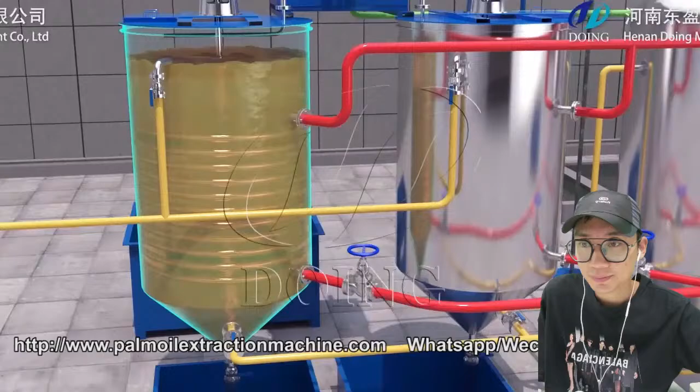Our company mainly serves you about cooking oil pressing equipment, refining equipment, and solvent extraction equipment. No matter what kind of equipment you need, you can directly put your questions or anything you like in the comments to let me know you're interested in our business.

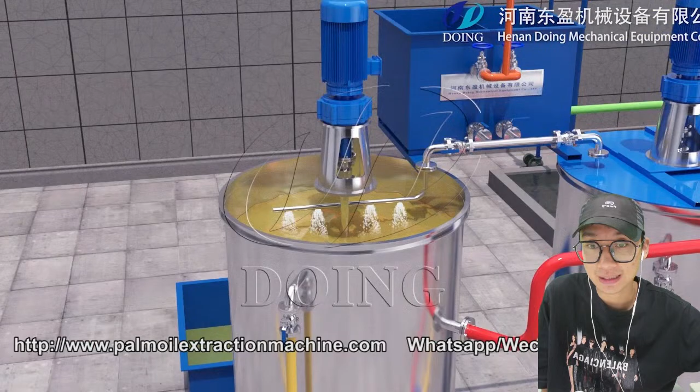Our company is located in Henan province, China, and we started the oil and fats business since 2011. So basically until now we've got more than 13 years of experience providing equipment for palm oil, palm kernel oils, rapeseed oils, sunflower oils, peanut oils. We can serve you for the solvent extractor, the palm oil presser, the refinery plant, or the cooker. We can provide all the equipment.

Before I introduce our company, I'd like to spend some time on the introduction about our company, Henan Doing Mechanical Equipment. It is located in Zhengzhou City, Henan Province, China, and we do have our overseas office, which is in Nigeria.

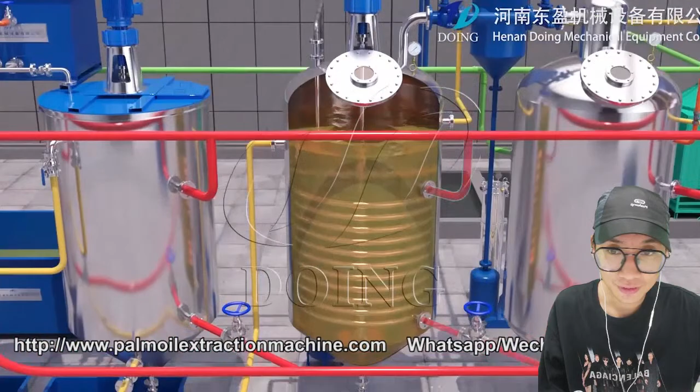Hold a second. Hey, what happened?

So yeah, we do have actually three factories, two of them in China, and one in Nigeria. Hey Joe, Mike, how are you? Good afternoon, welcome to the live stream. Nice to see you here.

This is Oliver from Henan Doing Holdings, and we can serve you with all kinds of refinery plant, cooking oils refinery plant, and also cooking oils presser, solvent extractor.

Hey Joe, where are you from? This is Oliver from Henan Doing Holdings. Hi, happy to see you, Joe.

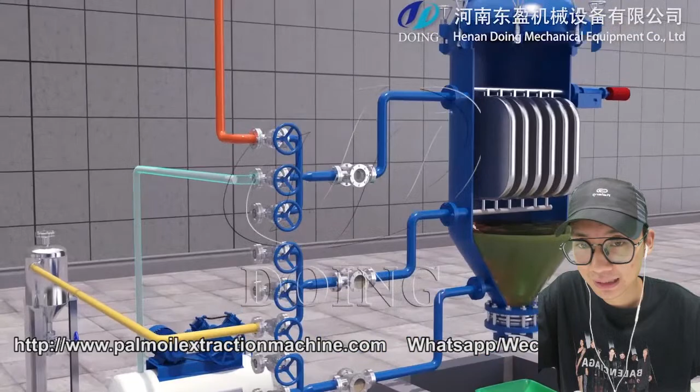I'm interested. What kind of equipment are you interested in, the refinery plant, our solvent extractor, or the presser? We can serve you with palm oil presser, palm oil pressing line, palm kernel oil pressing line, and ordinary oils like peanut oil, sunflower oils, rapeseed oil, sesame oil, soybean oils.

Oh, you are from Nigeria, right? That is so cool because we do have our overseas office and overseas stock in Nigeria. So if you want to visit for more detailed information, you are so welcome.

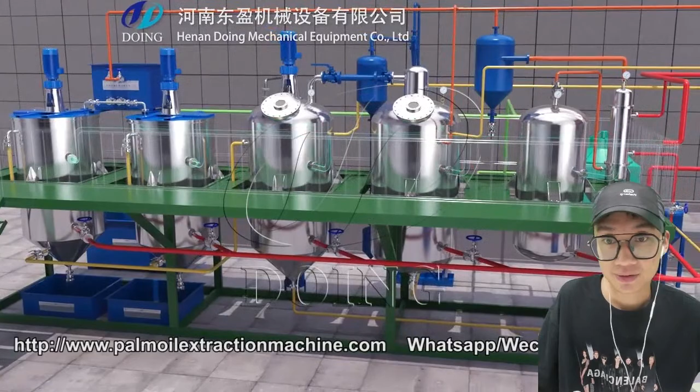For the batch type, we don't do the refinery in two pots. Instead, we do it in the same pot.

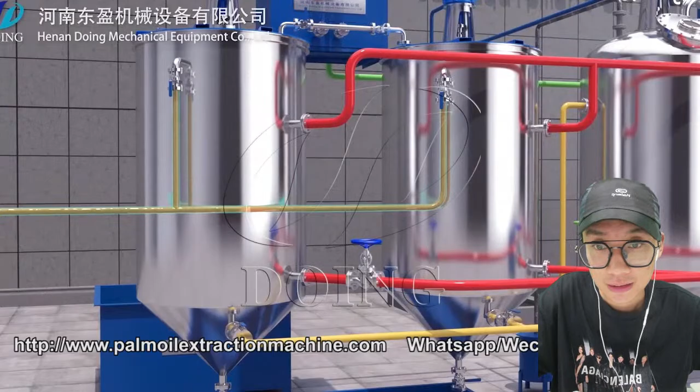For our equipments, you guys can check about the 3D videos first.

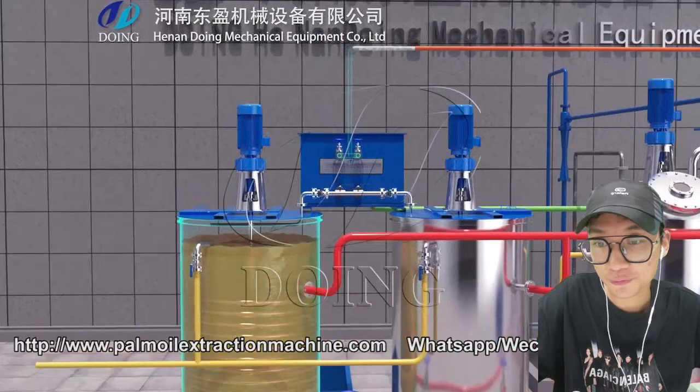The first step is degumming. We add food-grade phosphoric acid to the crude oil to transform the non-hydrated phospholipid into hydrated phospholipid, then add water to make the gum enter the aqueous phase so it can precipitate and be removed. The main equipment here is the refining tank with double speed mixing and a heating coil inside.

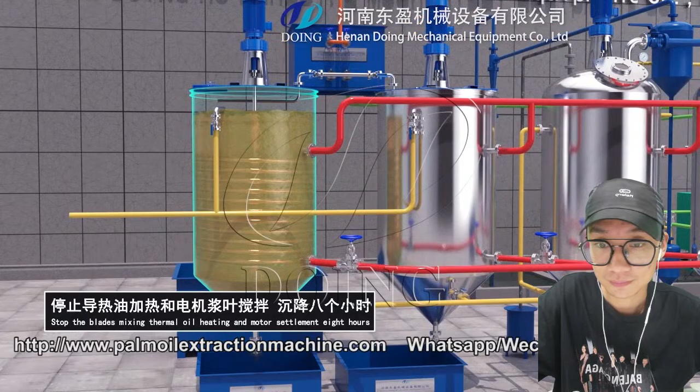What is the difference between palm oil refinery and palm kernel oil refinery? Joe, please add the WhatsApp number, because our sales manager can show you the difference.

Normally it is the same. You also do the palm kernel oils, right?

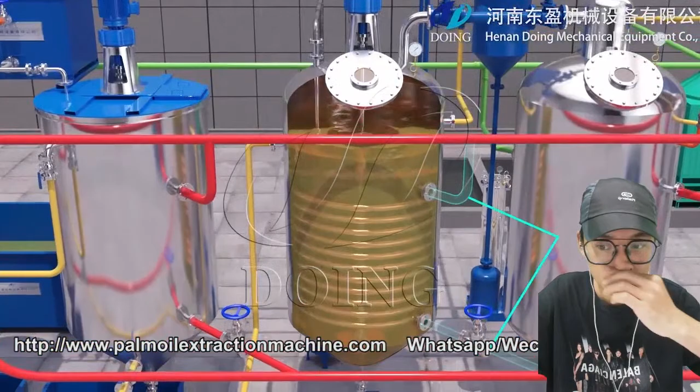Where is it? Okay, let's start from here again.

For the palm oils and palm kernel oils, you can basically use this whole processing line at the same time. It's actually the same equipment. This is the heat transfer oil flowing line. The first part is degumming, just like I said—we add phosphoric acid into the crude oils.

Next is our deacidification. The degummed oil is added with food grade alkaline for the acid-base neutralization reaction, then removed by heating and natural sedimentation. For detailed information, you have to check with our sales manager or our engineers team.

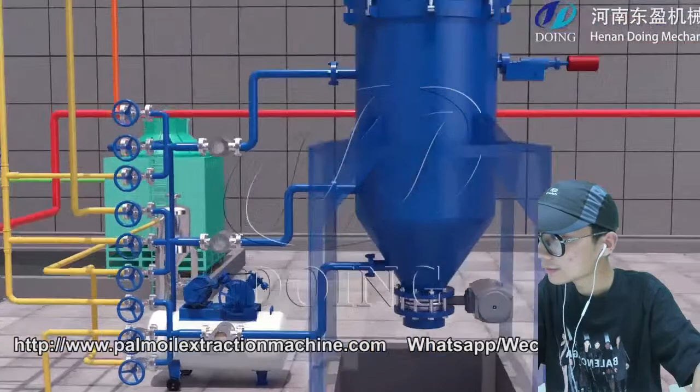And by the way, Thomas, where are you from? I'm from the US. For this year, we have our sales overseas office and overseas stock in Nigeria, so if you want to visit, you are so welcome, Thomas.

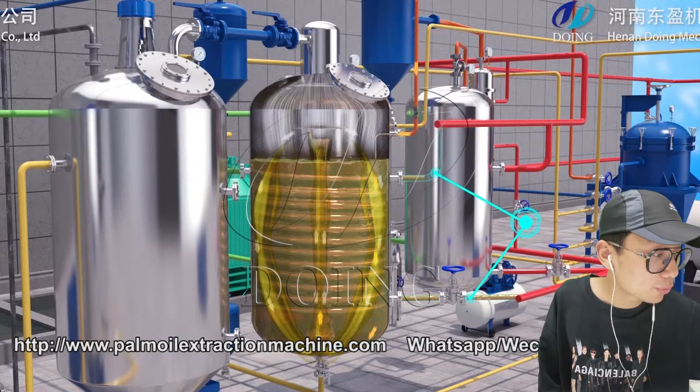After we finish the decolorization part, we also remove the clay through the filtration part. The solid-liquid mixture of decolorized oil and clay is introduced into the blade filter, and the white clay and oil are separated by filter plates so as to achieve the purpose of filtration.

Hold on a second, let me check about that.

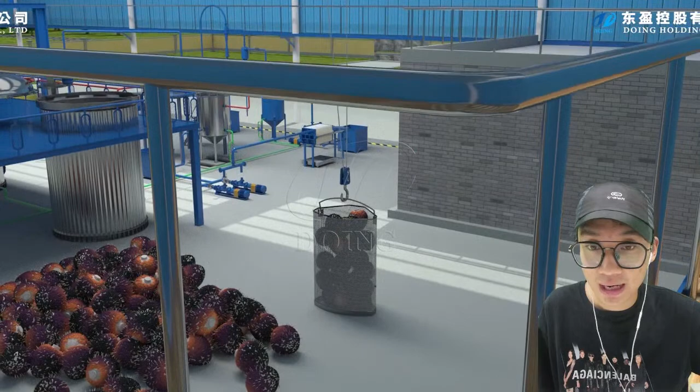It is the reception, and when you receive the palm oil, palm fruits, you better handle it within 24 to 48 hours, which is 2 days, to make sure of the final quality of the palm oils. And the first equipment that we use is the sterilization.

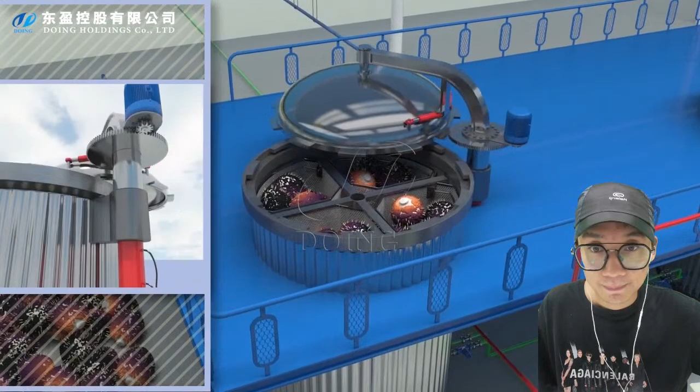You guys can see this is our sterilizer. You can input 4 fruit cages, or if you want, you can use single, double, triple, or use all of them. We also have a steam boiler, like a bundle. You can burn the woods, or you can just easily burn the empty bunches to bring the high temperature.

Especially for the sterilizer, the temperature is normally around 160 to 180 degrees, so that we can destroy the enzymes inside the palm fruits, and we can also avoid the increase of the FFA.

And what is most important, we can soften the fruit, so that at the next part, the thresher, we can make sure all of the fruits will easily come out of the bunches in a really easy way.

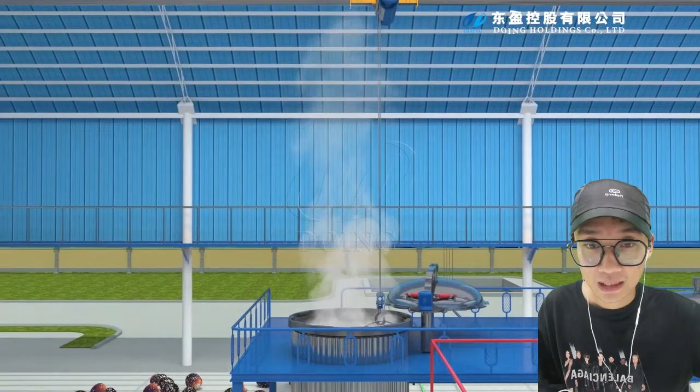Normally we will do the sterilization for 60 to 90 minutes and we're done with it. So we use the hanger to put all of the fruit out of the sterilizer and move to the next part, which is the thresher.

For this video, it is basically about the bigger capacity processing line, but we do also have simple versions. If you're interested, say something in the comments.

So currently, this one I'm pointing at right now is the thresher. Really simple structure. After doing the sterilization, all of the fruits will come out of the bunches in a really easy way. The length of the thresher is about 1 meter to 2.5 meters. It is long enough to thresh out the fruits.

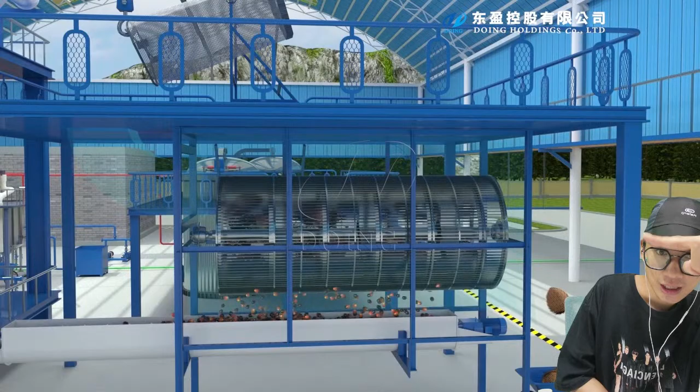And the equipment also rotates, so all of the empty bunches will come out of the thresher and be collected by the blue carts. Besides, inside of it, there is a helix design.

If you have any questions, just let me know by putting your question in the comments, ladies and gentlemen. And then it is our bucket elevator, which is connected with a screw conveyor.

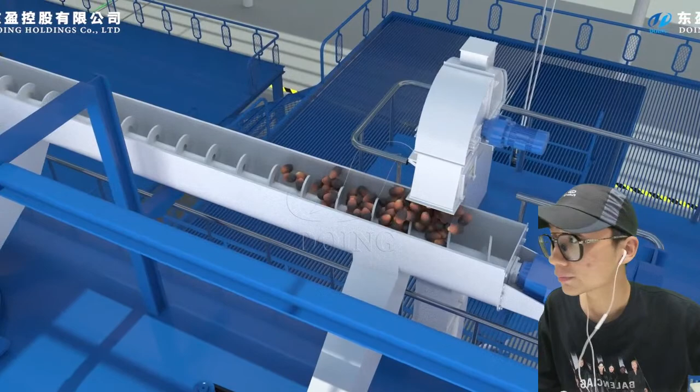And then it is our digester. There are so many stirrers and paddles adopted inside to digest all of the palm fruit before we do the pressing. During this part, you guys can check here the blue pipe around the digester.

It is actually a steam pipe. It can bring the high temperature again, to soften the fruit before we do the pressing, to make sure that all of the palm fruits are in the best situation before pressing.

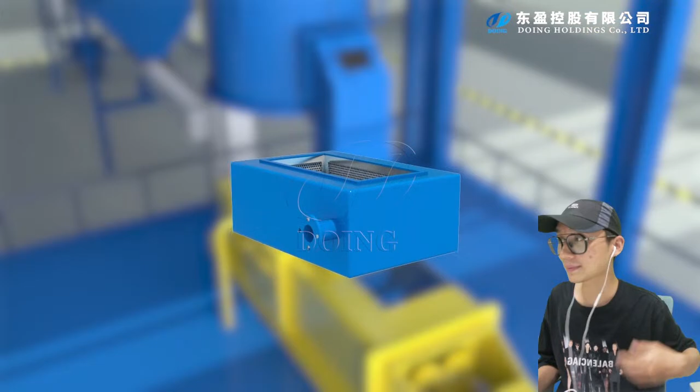And then this is our little collector, because during this part we get some of the crude oils. To avoid the loss and to improve the final crude oil quality and oil rate, we do set a collector.

You guys can check here, this is the main equipment in the whole processing line. This is our double screw palm oil presser, and we also have a single screw palm oil presser. The total difference is about the screw: one has 2 screws and the other only has 1. The single screw palm oil presser is more suitable for 500 kilograms per hour.

The capacity is normally about 500 to 800 kilograms per hour. But for our double screw palm oil presser, the capacity differs from 1 ton per hour to 100 tons per hour. So no matter how many scales you have, we can provide you a customized design according to your needs.

And just like I said, the palm fruit is a fruit that bears in subtropical and tropical areas, especially in Southeast Asia and Africa. They have done a perfectly good job with the equipment, but we have made a lot of improvements on that basis. For example, the palm oil presser.

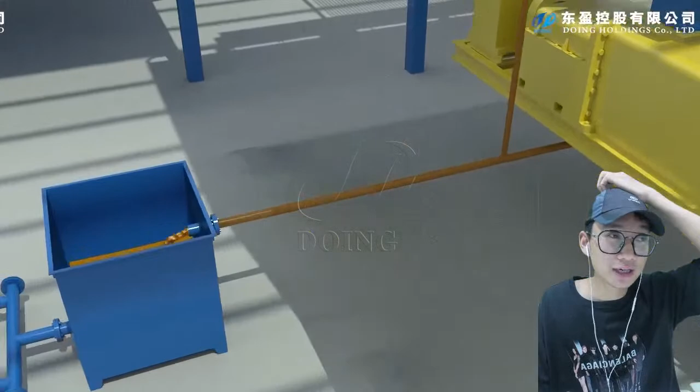But with our equipment, after we produce the screw, we do one more step, which is to polish it, to make it really smooth and tidy, so that all of the fruits get in touch with the screw. It will not easily cause clogging. And the oil rate is really high. The oil residue rate is normally around 3%, which is a really low rate.

And then this is our temporary storage box, and this one is our central vibrating sieve. You can see there are two mesh sizes adopted inside, one is 20 and the other is about 40. When it is working, it keeps vibrating, so all of the big impurities like the fibers or some nuts automatically drop at the impurities outlet, and the crude oil drops at the other outlet.

And then this is our clarification tank. The use for this one is to remove the big impurities like the nuts or metal things.

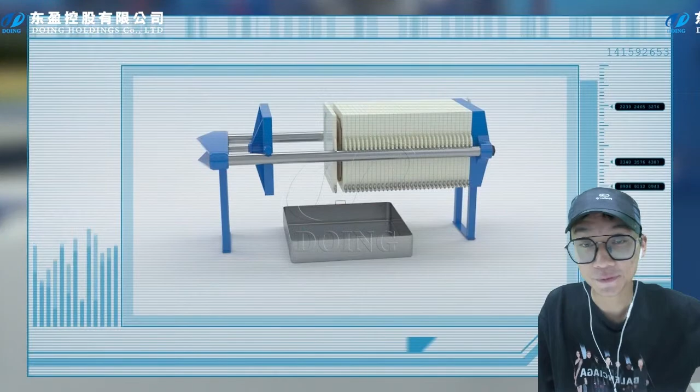plus a plate filter to do the filtering, of the big or tiny fibers, or the water content, the humidity. This plate filter removes the impurities, the fibers, tiny impurities, and also evaporates the water. And this one is our steam boiler to bring the high temperature for this whole production line.

So basically that is all about how we do the pressing for palm oil. And for today's live stream, the main thing is to show you the refinery plant. So let's go back to the refinery plant.

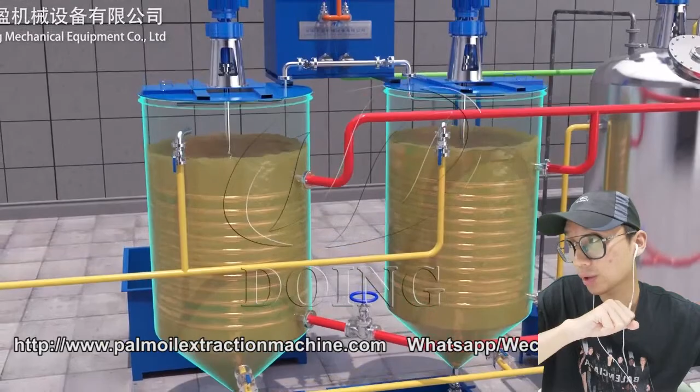So yeah, this is our refinery plant. So for the degumming part, we will normally add 85% to 95% food grade phosphoric acid, and the amount of phosphoric acid added accounts for 0.05% to 0.2% of the oil weight.

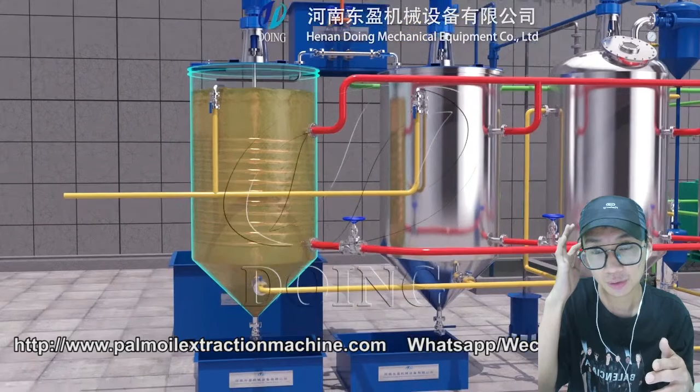Generally, the degumming section is not set separately for semi-continuous or batch type refining, but it is completed in the same equipment with the alkali refining section. I mean the degumming and deacidification of intermittent and semi-continuous refining are completed in the same tower. And for continuous refining, the degumming and deacidification are done in different equipment.

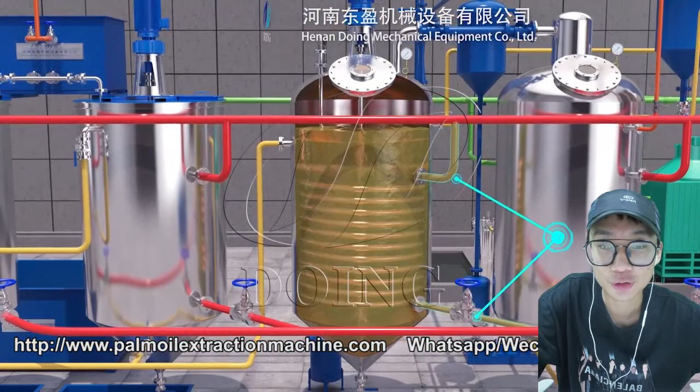And then it is our decolorization part. For the decolorization part, we will add 1 to 3% of the oil weight of decolorization agent for physical adsorption, and then filter equipment separates the oil and decolorization agent to achieve the purpose of decolorization. Yeah, this is the equipment that we use to remove the clays.

Let me just pause it here to show you more. Especially for the decolorizing, the specific process is in the decolorizing tower in a negative pressure state. We will add 1 to 3% of the oil weight of the decolorizing agent to do the physical adsorption, and then filter equipment separates the oil and the decolorizing agent to achieve the purpose of decolorization.

The pigment components in vegetable oil are very complex, mainly including carotene, flavonoid pigment, anthocyanin and some carbohydrate and protein decomposition products. Oil decolorization commonly uses adsorption decolorization. The principle of the adsorption decolorization method is to use an adsorbent with strong adsorption power to adsorb pigment and other impurities in hot oil, and to remove the adsorbed pigments and impurities while filtering the adsorbent to achieve the purpose of decolorization and purification.

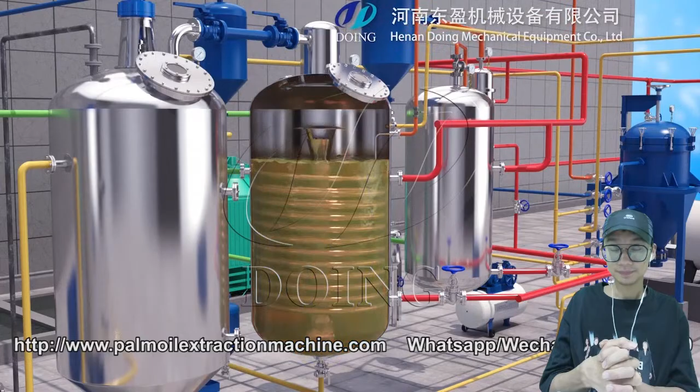That is basically all for the refinery plant. And hold a second, let me show you the fully continuous one. This one that I'm showing right now is a batch type one, but we do have a fully continuous one. Yeah, it is over here. You guys can see this one. It is about 100 tons per day. It's a fully continuous refinery plant, which is more complicated.

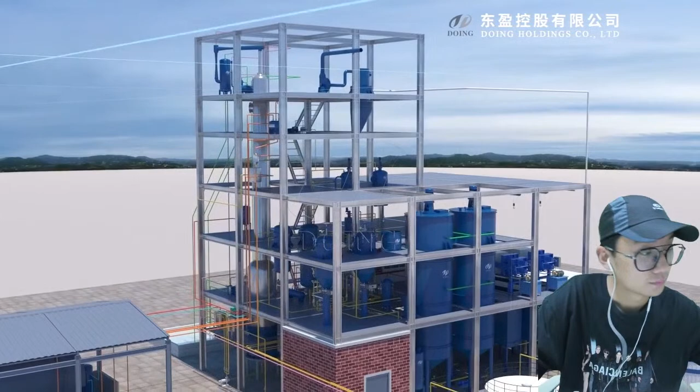Wait, what? Yeah, I'm still lagging. It is so obviously.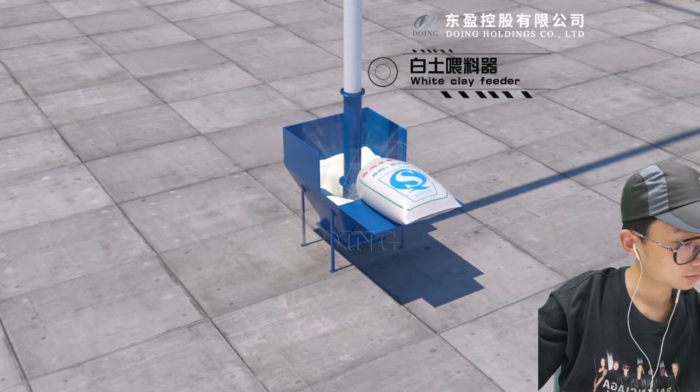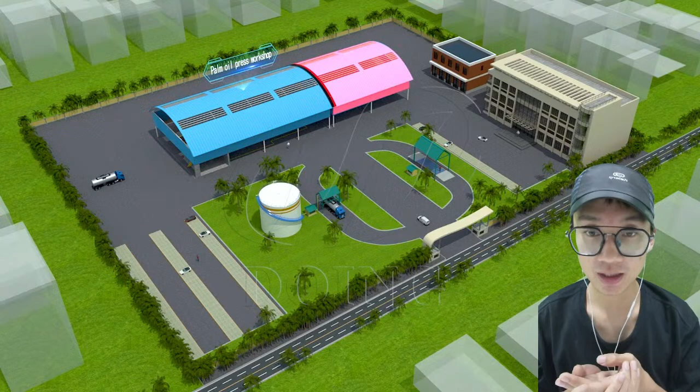All right. I mean, yeah, if you're curious about this fully continuous one, it is normally suitable for 100 tons per day. But if your workshop is smaller, you can choose the batch type one. I just let you guys watch the palm oil processing line, but also let me show you the palm kernel oil processing line, which we can also serve you with the equipment. No matter the presser, the solvent extractor, or the refinery plant, we can serve you guys.

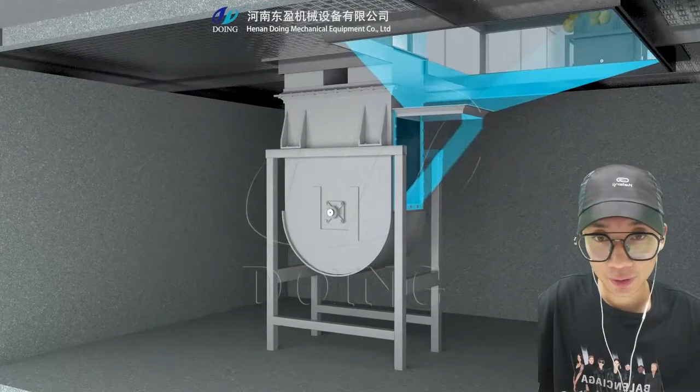This is our palm kernel oil processing line. Let me just start from the beginning. If you have already done the palm oil or palm kernel oil business, you will know when you get the palm kernel, there will be a lot of fibers on the surface. So this one is our separator for the kernels and fibers. Really simple structure.

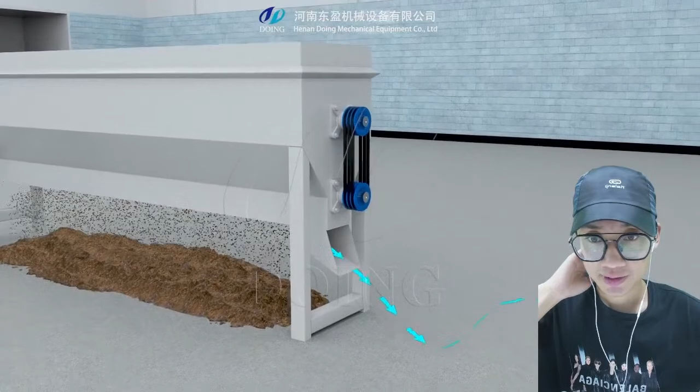And then it is our kernels and shell separator, because before we do the cracking, before we do the pressing, we have to separate the shells, because the shells don't have oil, and they will also take away some of the crude oil and lower the oil rate, and sometimes they will also damage the presser, so we'd better remove the shells first.

This is our bucket elevator. This inlet part normally touches the ground or is underground. And over here, where I'm pointing right now, there will be a magnetic separator to separate the metal things. If there are irons or some really hard things mixed inside, you can easily separate them. Otherwise, they may damage our equipment.

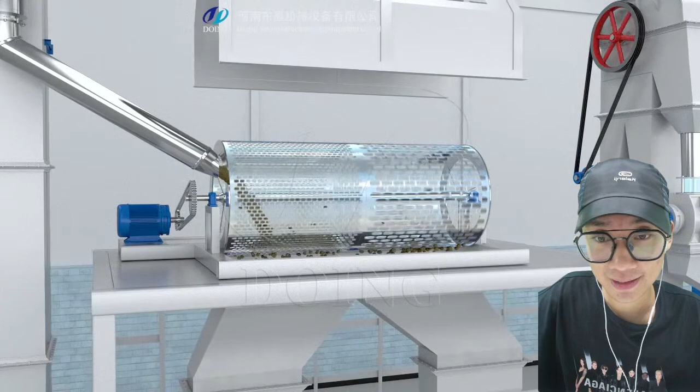And then it is our nut grading machine. You guys can see the left part's mesh size is smaller than the right part's. So it will separate the nuts into two parts, smaller size and bigger size, because the next equipment we use is a cracker to crack the nuts into shells and kernels.

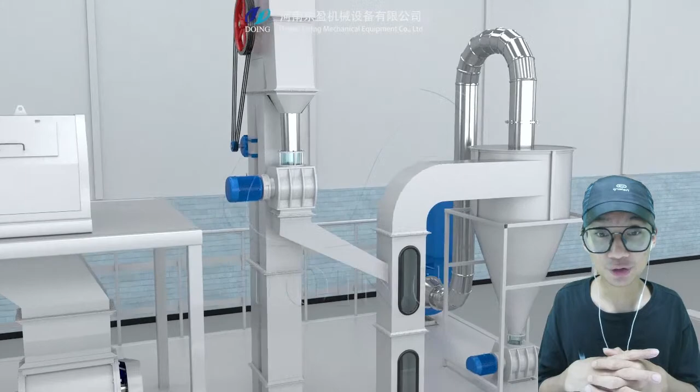This is our cracker, really simple structure, rotating at a really high speed. After the cracker, we normally get the shells and the kernels at the same time, mixed together, and then through our screw conveyor connected with our bucket elevator, they get into this separator. The weight of the kernels and the shells is totally different, so all of the kernels will automatically drop to the bottom, and our shells will easily be collected by the cyclone and the fan.

Yeah, this is the cyclone and our fan, to make sure the shells will not fly around in the workshop, to keep our workshop clean and tidy. This is our separating column.

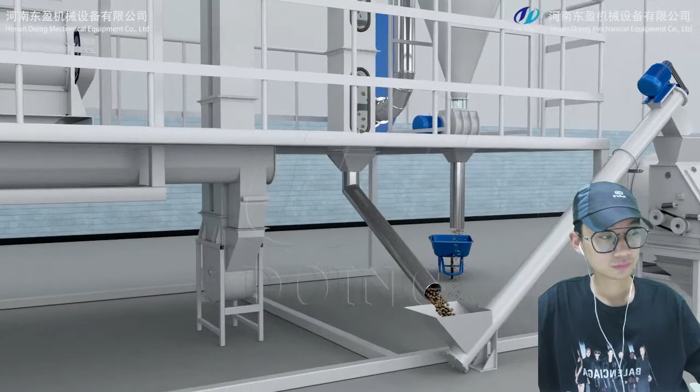And then it is our crusher. Normally we crush our kernels into small slices, normally 4 or 5 slices, so they will be in the best condition before we do the pressing. And then it is our cooker, or we can just call it a roaster.

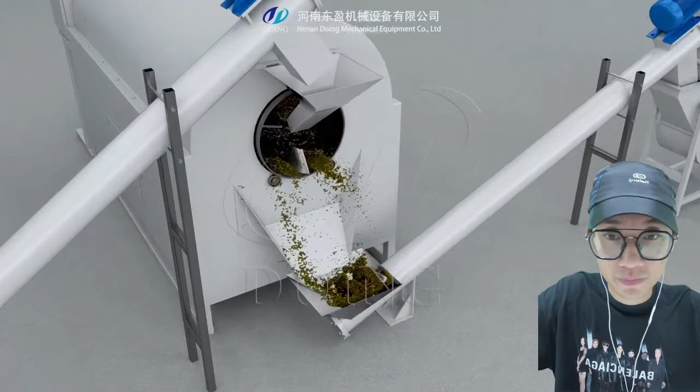Helix design, really special design. We can easily control the temperature and the humidity. And then it is our palm oil presser. Bucket elevator.

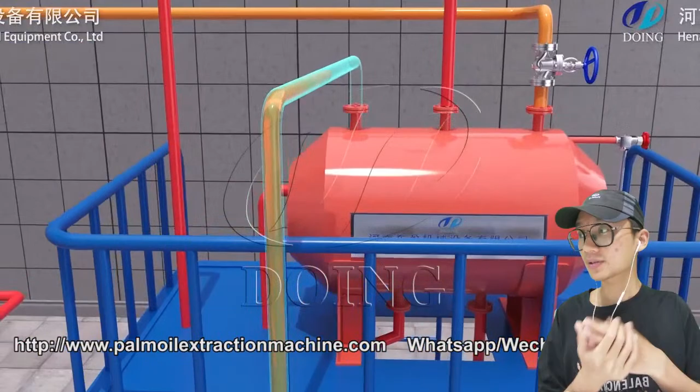Henan Doing Mechanical Equipment is located in Zhengzhou City, Henan Province, China. And Doing Group is an enterprise integrating engineering, R&D, equipment manufacturing and installation, project contracting, technical service, and international trading. We are mainly engaged in grain and cooking oil machinery, tire process and distillation machinery, cassava products deep processing machinery, starch machinery, and some business like this.

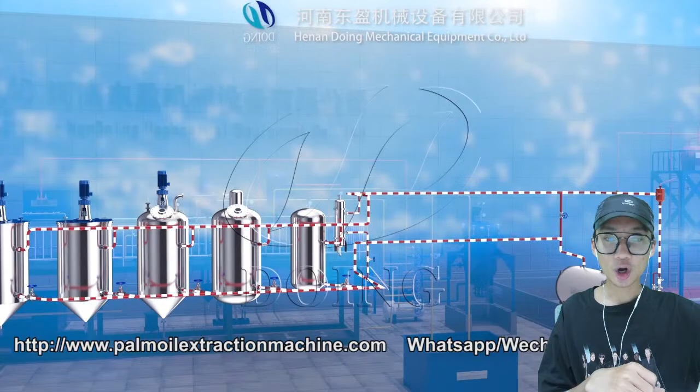And our company has a powerful capability of scientific research and designing, hardware facilities, and we use advanced techniques. We have more than 30 senior technical staff majored in oil technology, electrical appliances, automation and machinery. We established perfect cooperation with Henan University of Technology and have undertaken to complete a number of major engineering and technical services abroad. We own a professional installation team with rich experience, which guarantees the quality of the project.

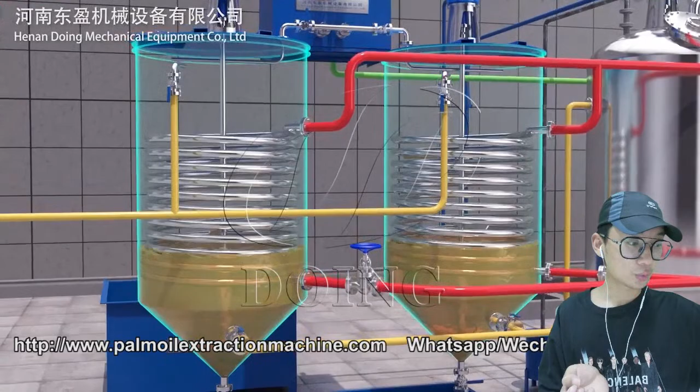And Doing Group focuses on developing new products and technology. We have developed 1 to 120 tons per hour palm oil processing equipment. Our designing technology and manufacturing ability have reached the top level in the world. Our machines have been exported to more than 40 countries like Indonesia, Malaysia, Thailand, Nigeria, Liberia, Congo, and some countries just like this. And we do have our overseas office, which is in Nigeria. So if you are living in the nearby countries, welcome to have a visit.

And we can serve you 5 to 2,000 tons per day edible oil pressing machines, 30 to 2,000 tons per day solvent extraction machines, 1 to 1,000 tons per day edible oil refinery machines, 1 to 120 tons per hour palm oil mill machines, and 5 to 600 tons per day palm kernel oil mill machines. So if you do need anything, let us know. We can supply you the best quality equipment at a relatively low cost.

So if you do need anything, you can just let me know what kind of oil seeds you have, and how many hours you work in one day, so that we can serve you a customized design according to your needs, ladies and gentlemen.

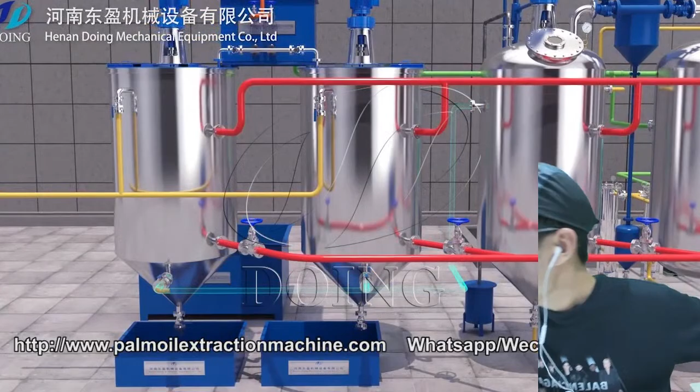We can serve you the ordinary oils and palm oil, palm kernel oil production line equipment, no matter for the presser or solvent extractor.

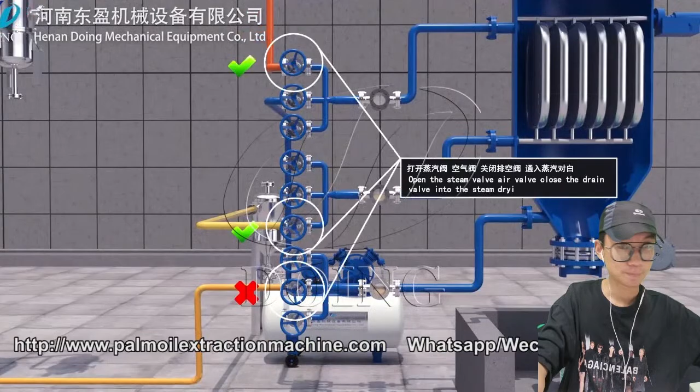I mean, especially for this one, there's nothing much that I can explain. But we can show you our previous videos. Let me check if there are any videos of the refinery plant on this computer. If you guys can give me a minute, if there are any of our previous plants' videos. This is the solvent extraction.

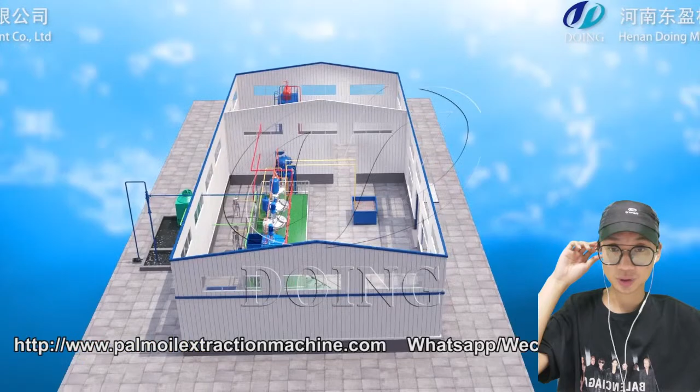And our company is called Henan Doing Holdings, based in China, but we do have the overseas office in Nigeria and overseas stock in Nigeria. If you guys want to have a visit, you are so welcome. And we have more than 20 engineers in our team. They are very professional, and they all graduated from the only university that has the oil and fats major.

So if you'd like to do the oil and fats business, especially for palm oil and palm kernel oils, we are the best choice for you if you want high quality with relatively low price equipment. We are your best choice because our equipment is all made in China. It is all made by ourselves.

We have three factories in total. Two of them are in Jiaozuo, Henan province, China. The total area is about 40,000 square meters, with more than 200 workers producing the equipment for our clients. And we have one overseas factory, also in Nigeria. No matter for the shipping or for the installation, it is really convenient for both of us.

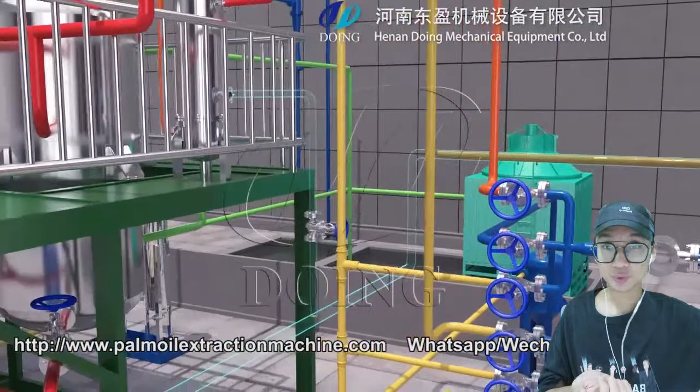And our company has a powerful capability of scientific research, designing, and office hardware facilities. We use advanced techniques and top manufacturing devices. We have more than 30 senior technical staff majoring in oil technology, electrical appliance automation and machinery. We established perfect cooperation with Henan University of Technology and have completed a number of major engineering and technical service projects abroad. We own a professional installation team with rich experience, which can guarantee the quality of the project.

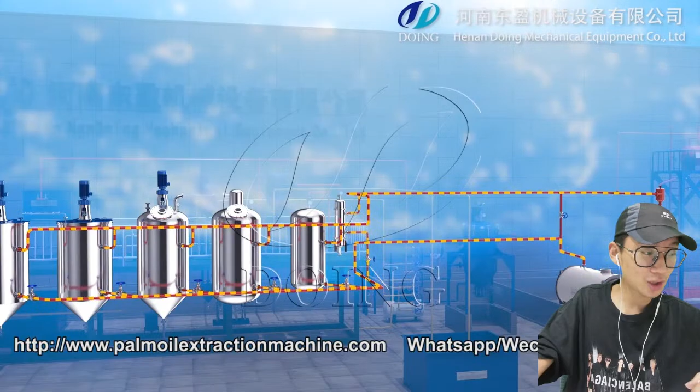If you already do the oil and fats business, you can just let me know what kind of oil seeds you have. Because according to different oil seeds, we have different equipment to serve.

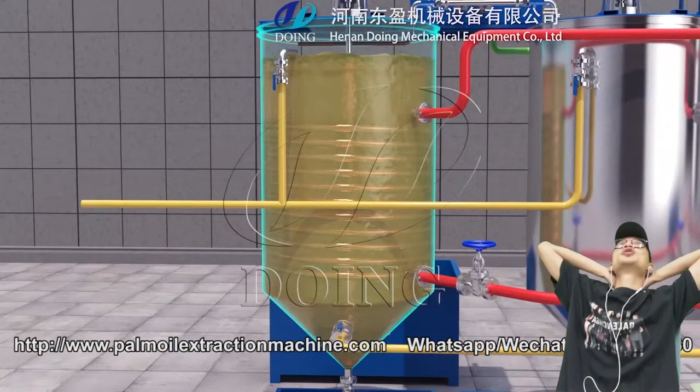We'll show you the palm kernel oil pressing line, no matter the presser, the separator or the refinery plant. We can show you detailed information.

Boo asks about animal feed additives. We don't have that equipment. We mainly provide edible oil pressers, solvent extractors, and refinery plants.

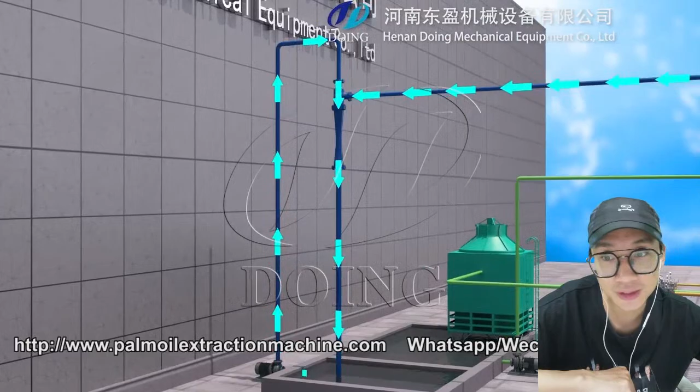For this whole refinery plant, there are 6 things I'd like to stress. Our deodorizing part is stainless steel because the deodorizing temperature is relatively high. Carbon steel has manganese, and more than 260 degrees, the manganese will carbonize, which is harmful to the human body. So we use food grade 304 stainless steel.

We also use a leaf filter, not a plate filter or film filter. The leaf filter automatically removes impurities, so there's no need to manually clean the filter cloth. It's labor saving and highly efficient, and the heat conduction oil system provides the heat source for the whole refining process.

Our pumps are different from others. Not all pumps are gear pumps. For example, the water supply system is equipped with multi-stage pumps or centrifugal pumps that can withstand high pressure and are really efficient. The bag filter catches impurities in the equipment as well as impurities in the decolorized oil. The expansion tank reduces peroxidation of the thermal oil. It can also be recycled without electricity to prevent machine damage.

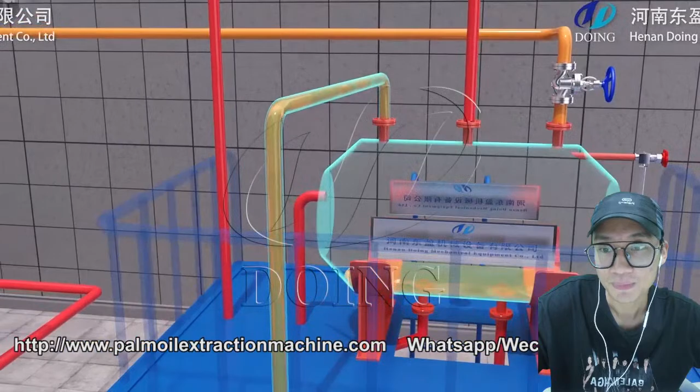If you need anything related to the oil and fat business, let me know. Especially for the video we're doing right now, it is for the refinery plant. For each part, we have the equipment, and the unit belongs to intermittent refining, with all the functions of large and medium-sized intermittent refining equipment, superior to large and medium-sized refining equipment.

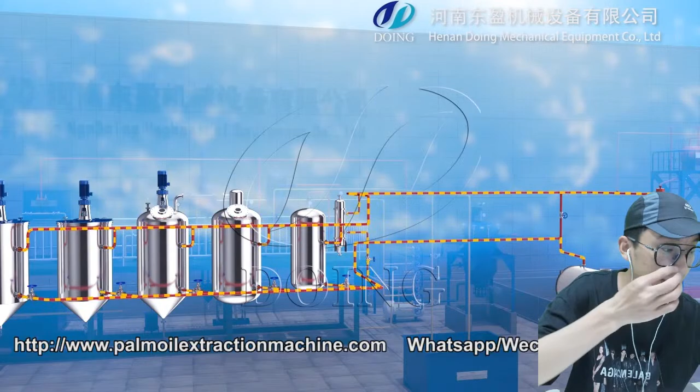Let's see if there are new comments here for our provided videos. Oh, there's no one watching.

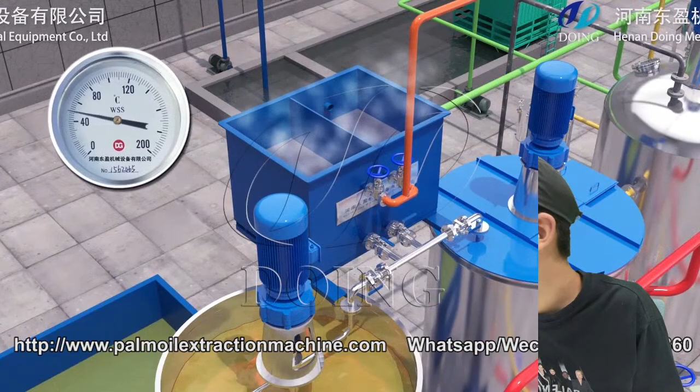We will show you the refinery plant, the palm kernel oil pressing line about the presser, and the pre-pressing machines, all inside the factory. We will also show you how we do the packing and packaging. Don't worry about shipping, because we have our overseas stock, which is really convenient for both of us.